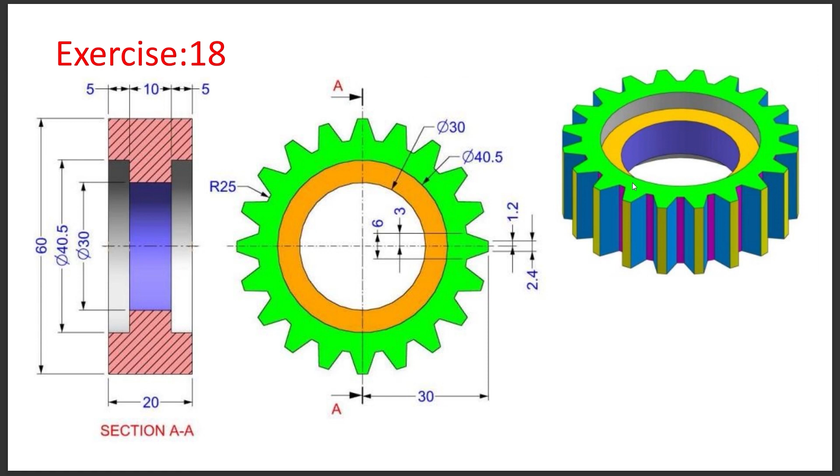Again, we can consider that this distance and this distance are equal. And in between, half of the distance is equal to 3 millimeter. So total from here to here is 6 and half of this one is 3 millimeter. So we can start this one from the top plane. Initiating the sketch, starting with a circle, and the diameter of this one will be 40.5 millimeter.

Next to that, we can create a construction line. This is required to make the profile symmetric, and with respect to that line, we need to make a mirror of that profile. So make the construction line. Now we can change the solid line to a construction line again. Next to that, we need to create some arcs.

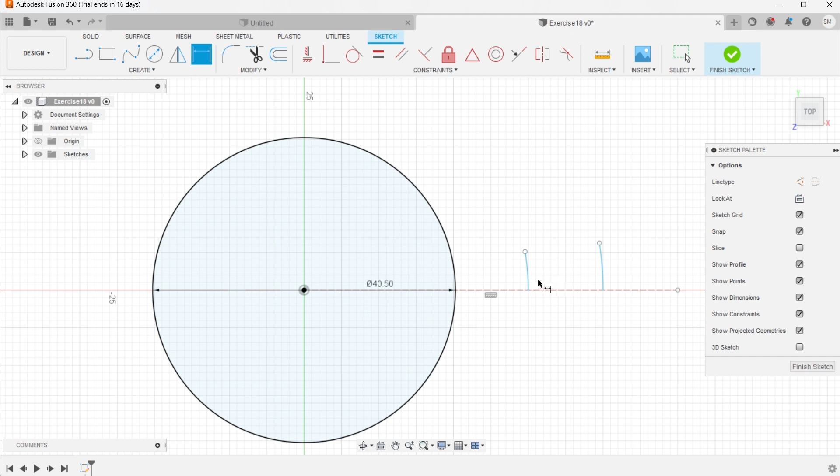Starting with arc, and it will be a center point arc. Let us start from here. You can provide another arc also. Both the arcs are made, and let us provide smart dimension to this one, as this radius is 25 millimeter and this one is 30 millimeter. Now we need to provide a smart distance from this one to this one. From here to here, the distance will be 1.2 millimeter. Again, the distance from here to here will be 3 millimeter.

Again, we need to draw another arc from here with the same radius. Create arc, it will be a center point arc. This is the center point, and we are starting an arc from here. Let us provide smart dimension to this one as 2.4 millimeter. Done. Now we need to create some arc to join this profile from here to here.

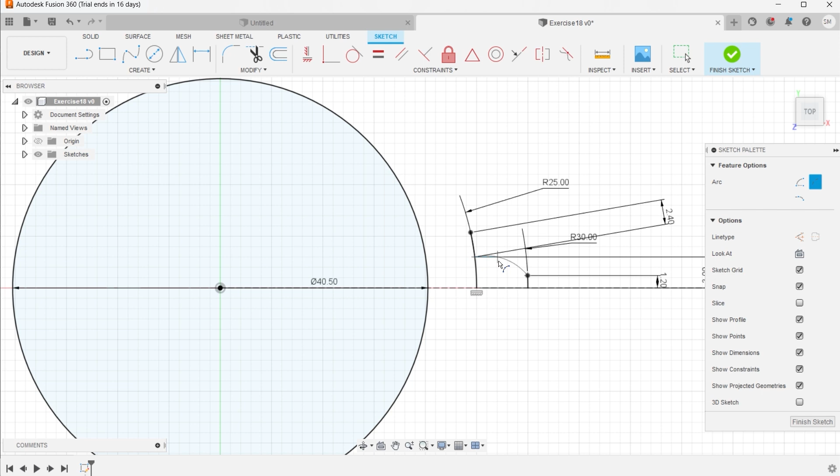So again, starting with arc, it will be a 3-point arc. Actually, this is not clearly defined, so we are doing this one at random. Starting an arc from here, it will be finished at this location, and we can provide some radius to this one. We're providing this one to be the profile of the tooth. The line is blue, so it is not fully defined.

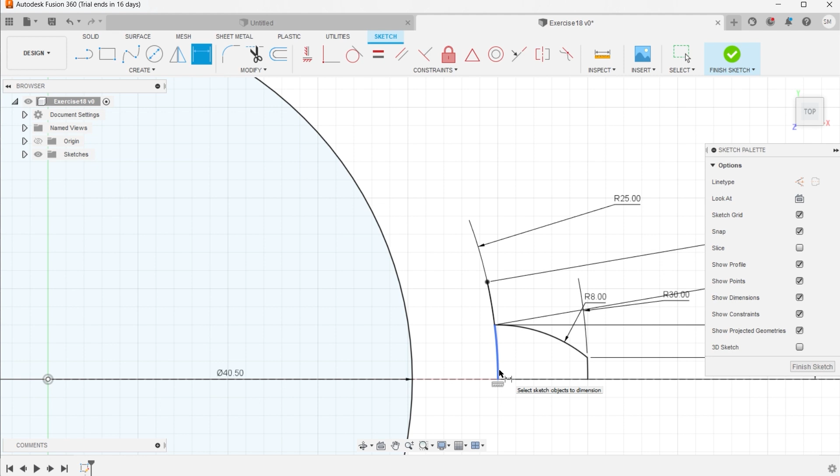We can provide smart dimension to this one with the radius. Let's put the radius to be 8 millimeter. Done. The sketch is fully defined. Now we can trim some unwanted lines from here. Now we need to make a mirror of this one. So create mirror. We need to select specific lines.

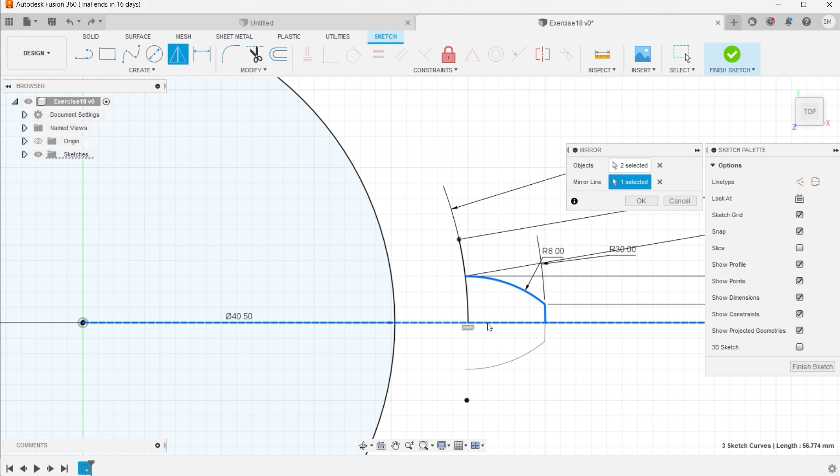Selected. Now we need to select the middle line. This is the middle line. Done. The profile is made, right?

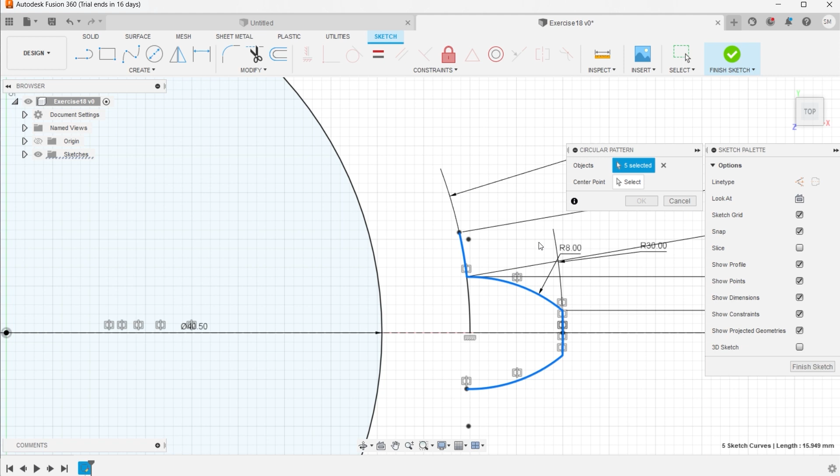Now we need to create a circular pattern with this teeth. So create circular pattern. You can select that object or the sketch. The sketch is selected. Now we need to select the center point for creating that pattern. This is the center point selected, and as per drawing, we need to create 20 numbers of teeth. So write 20, enter. The profile is made.

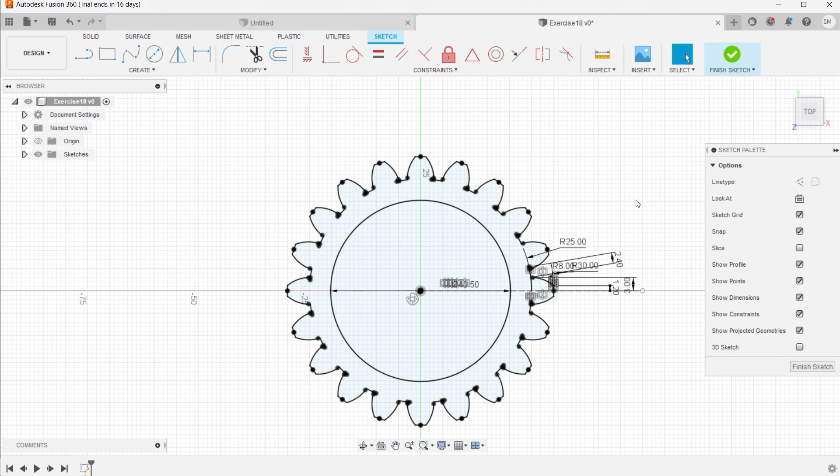Now we can finish the sketch and that to be extruded to a specific depth of 20 millimeter, right? Let us finish it and see how much to be extruded again. That can be seen from the drawing again. You can see the extrusion depth is actually 20 millimeter, and also inside this one we need to make two concentric circles of diameter 30 and 40.5, and that to be extruded to a depth of 10 millimeter only, right?

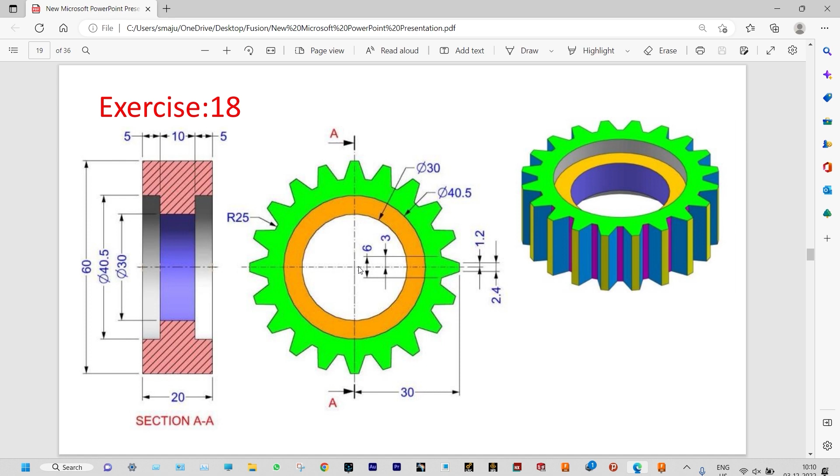So initially we need to extrude that complete profile to a depth of 20 millimeter. Again, inside this one we need to make concentric circles of diameter 30 and 40.5, and that to be extruded from the central plane to a depth of 10 millimeter.

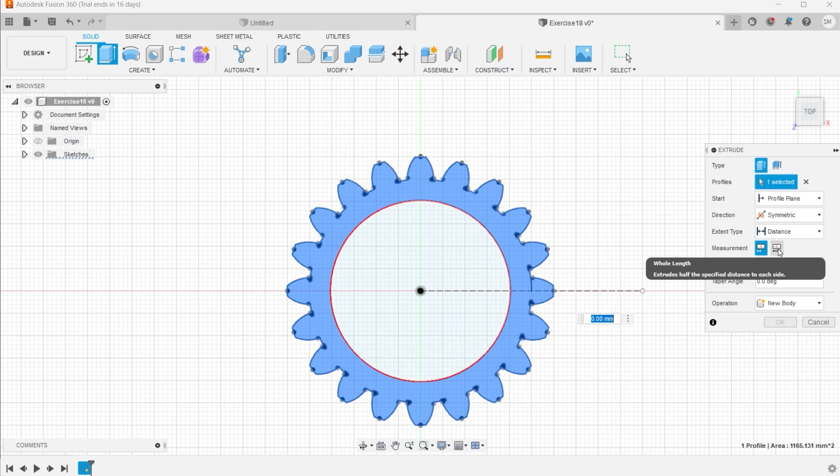Okay, so extrude, select the specific areas. Now from direction you can select it will be extruded in symmetric directions, and instead of half length we are considering this to be full length, to be extruded to a depth of 20 millimeter. Okay, let us see this one. This is the profile, right?

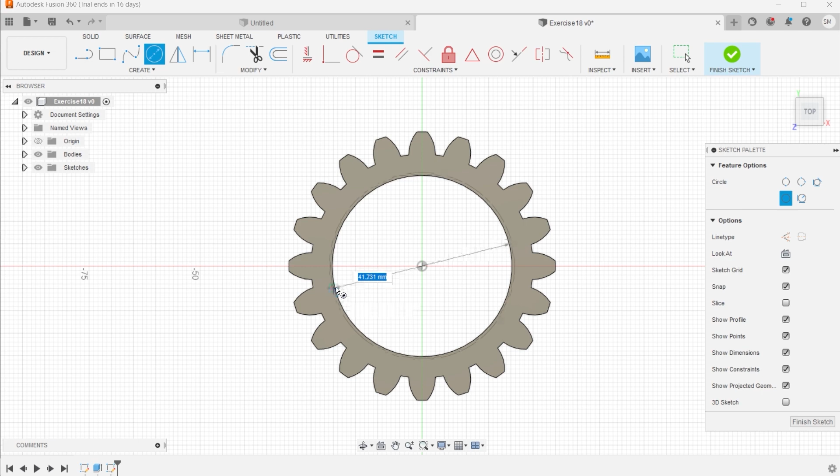Next to that we need to create another sketch inside, right? So starting with sketch from here with the top plane, we need to draw two concentric circles. Let us draw it. Initially we'll draw any arbitrary circles and later on we can put smart dimension to this one, and the dimensions are 30 and 40.5. So let's put smart dimension to this one. This is diameter 30 and this one is 40.5.

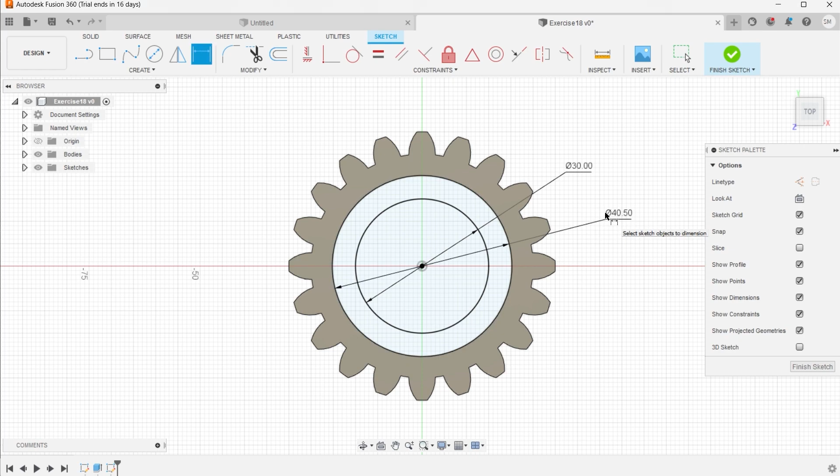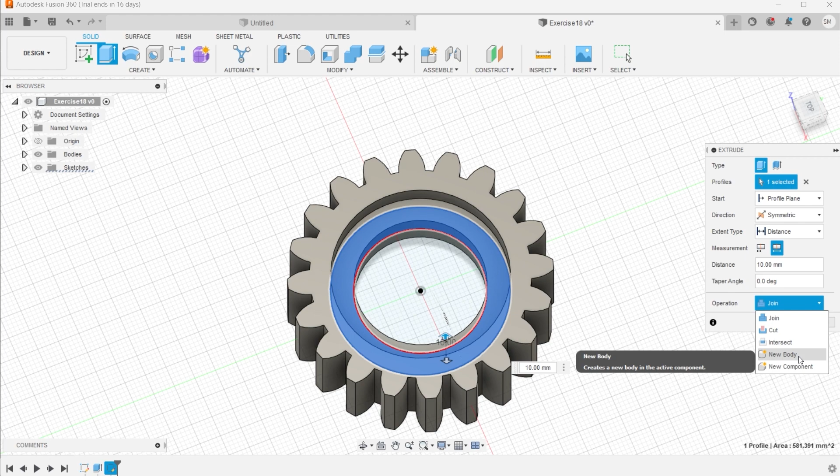Enter. Sketch is finished, and that to be extruded to a depth of 10 millimeter. So extrude and select the specific areas, and instead of one side you can make it symmetric to both sides, and measurement we are considering this one to be whole length, and the distance of extrusion is 10 millimeter. And in this case we have to make this one as a new body again, so it will be separated from the mother body, right? Done. We made this one.

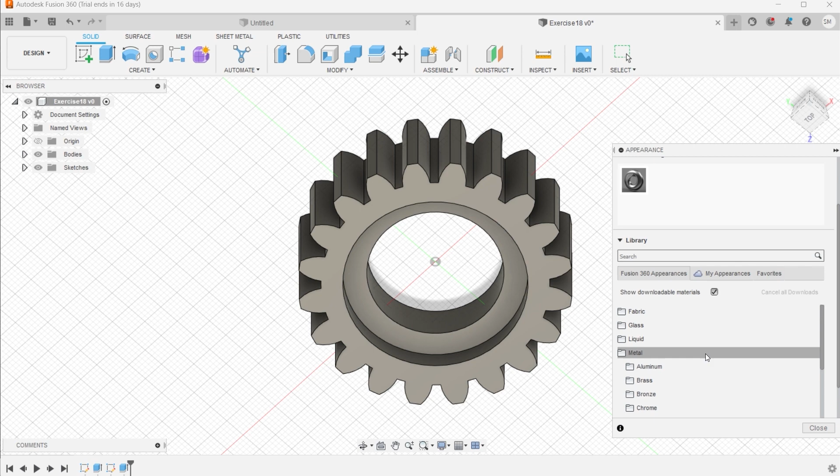You could have joined this one with the parent body, right? That is as per requirement, right? Now we can provide appearance to this one. Inside we will provide different material and outside we will be having different material. So hit A, let us provide metallic appearance. So metal, the teeth we are providing made up with polished rouge. Okay, and the inner part will provide this one to be made up of stainless steel with satin finish.

Done. So this is our model, right? You can see it. This was a very simple model, and we initiated the model from the top plane. Initially we made one half of the teeth, and that was mirrored with respect to the central axis or central line. Then that tooth was actually patterned in the form of a cyclic pattern, and next to that we provided two concentric circles of diameter 30 and 40.5 inside, and that was extruded symmetrically to a depth of 10 millimeter. Okay, so this one will conclude our 18th exercise.